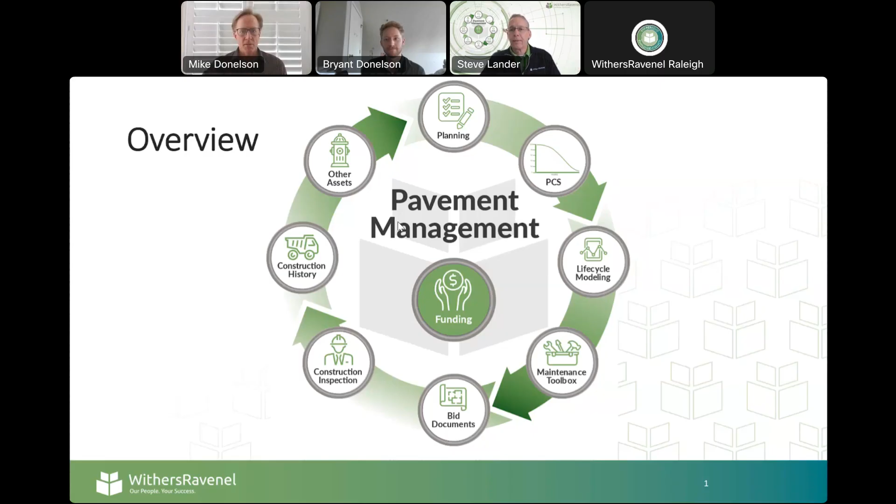All right, fantastic. Thank you. Who we are: as Donelson Construction, I'm involved with 3 different companies that we manage. We have a rock quarry, so we are an aggregate producer in southern Missouri, which is where we're located. Had this quarry for over 50 years, so we've been in business a very, very long time. And as Bryant indicated, my family goes back a long, long way in the construction industry. But we also produce our own emulsion. We develop our own technology, our own equipment, and we are a contractor. So we're honestly very unique in who we are and what we do.

And we do this by choice and almost forced into it over time, because I'm an engineer first. I'm not a sales guy. And so quality control, all those things that I learned at an early age in a different career, I knew I had to bring to this industry, which was and still is: well, you pick a local aggregate, you find somebody to make some oil, you go out and you do a surface treatment, and really it's a flawed method. It's a flawed way of doing things.

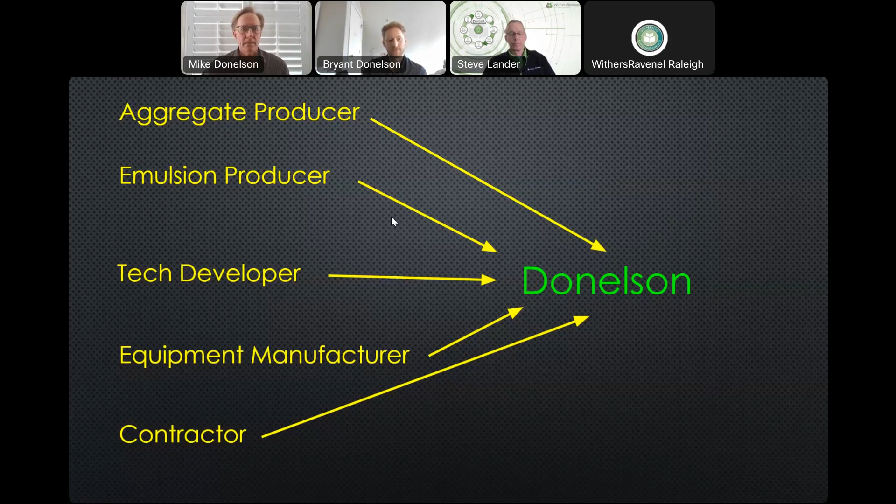And we found a long time ago, the best way to produce the best results is going to be to hand pick an aggregate, hand pick the emulsion oils, the oils that go into producing this asphalt, and then all the other things along with it, and finally the guy that installs it. So with us, you're pointing the finger at one individual at the top as far as quality control, and so that's really why we do what we do. Everything that we produce does, like I say, come out of this 800-acre quarry in southern Missouri.

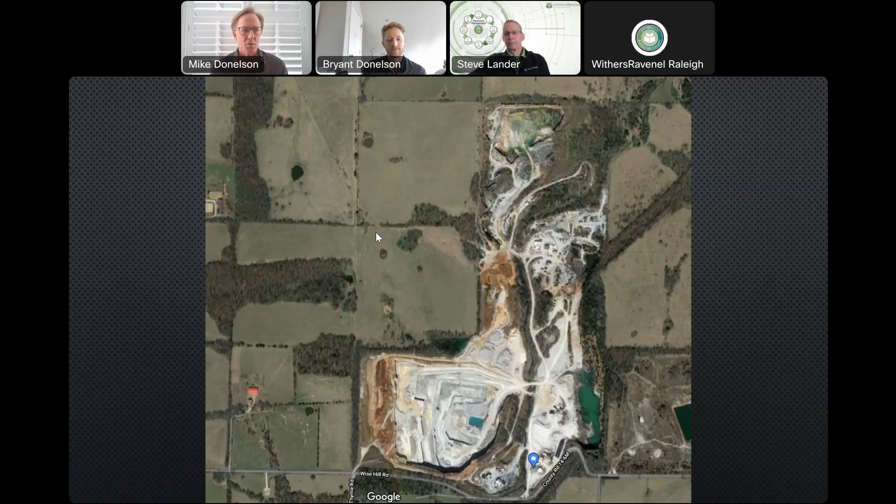And in the genre of products that I'm talking about, which is utilizing aggregates and emulsified oils, which is the industry standard for surface treatments, generally speaking, they're all made in that same genre of rock and oil. We have just, God blessed, some fantastic aggregate at this quarry, and then our own emulsion that we specifically design for that aggregate that gives us the best results. And I will dive into that in just a second.

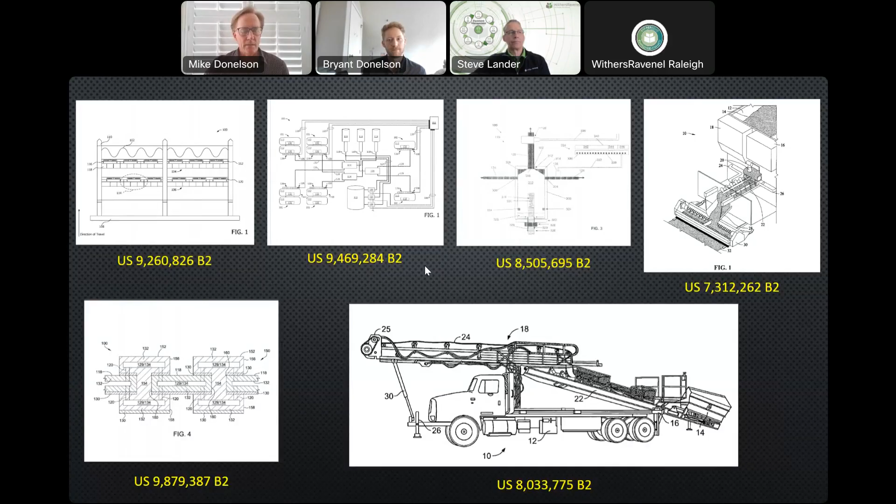As a result of our specific methods and everything, we have several United States patents, and I actually just got another one approved a week or two ago, and I've got others that are in the process of being approved. And you get these, they don't just hand these out. You get these because they're innovative. They provide a great benefit to the industry. And again, you're going to see some of the results of what we do and why we're able to achieve those patents.

If you haven't seen the PressurePave system yet through the videos, I would highly encourage you to visit our website and watch some of these videos. But what the PressurePave system is actually doing is putting down two different products at the same time. And I'm going to get to show that in just a second here. But the driving surface is the MAQS, Modified Aggregate Quickset. And we actually have a patent on the driving surface alone.

And I've been doing this driving surface for about 20 years now. So a lot of longevity with it, a lot of great results over the years. And then we incorporated at a much later date, probably about 5-6 years ago now, the pressure injection crack system and stress absorbing mastic that goes underneath this driving surface.

So if you look at the three options that we currently have, the 1/8 of an inch, the 1/4 of an inch, and then the 3/8 of an inch. The 1/4 of an inch is kind of our bread and butter. That is the type 2. That is the one that we utilize most in residential areas, in light collectors, some heavy collectors. And I'll show you some longevity pictures of that in just a second. So that one's really been our bread and butter.

We've done it the longest. 3/8 of an inch is something that we developed later to get that same longevity out of some heavy arterials. So I've got that product currently on an arterial in our area that's seeing 35 to 40,000 cars a day. That's a lot of traffic. In the city application, that's a lot of traffic.

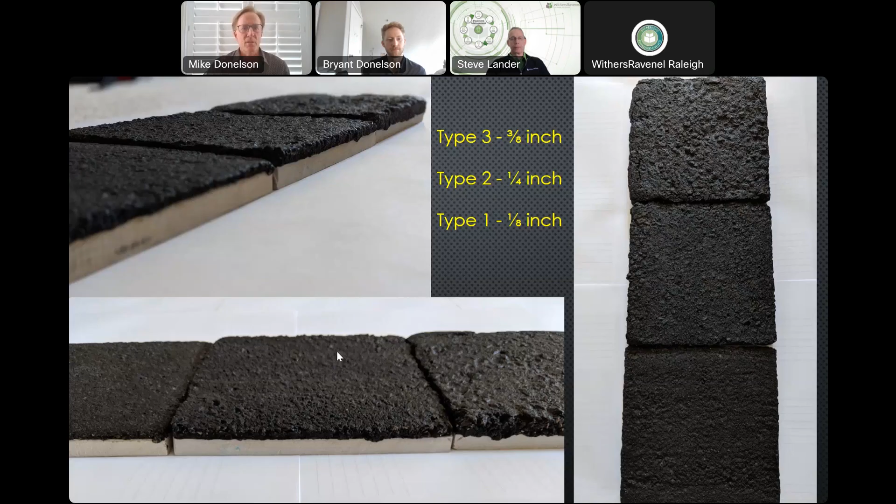And so we have gone to the 3/8 of an inch version in those applications, but the 1/4 of an inch is the one that, as Bryant indicated, you put on a light collector residential street. We've got a long history of 12 to 15 years of life out of that, and it's actually still looking really good. And I'll dive into that in just a second.

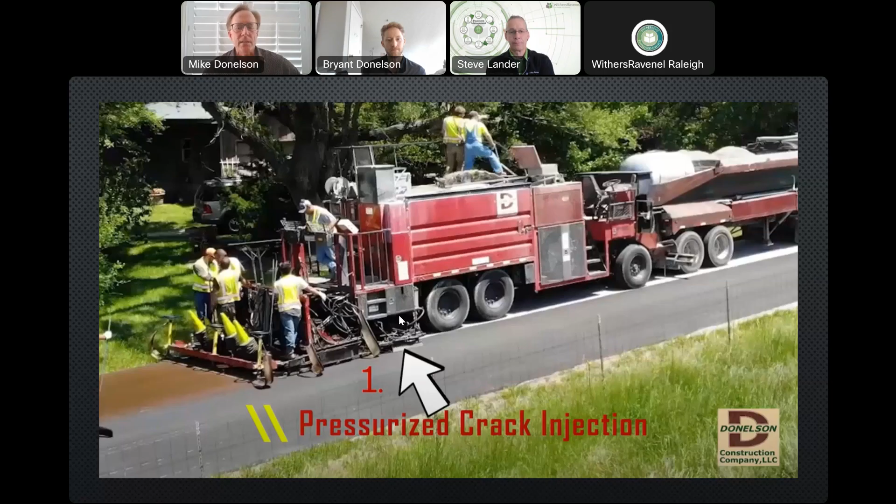But also what is being pumped on board to this unit is the PressurePave sealant. And that is what we're doing in this area right here. So we are pressure injecting a material onto the pavement ahead of that driving surface. This is our PressurePave sealant.

And this device that we have a patent on is a scissor-like mechanism. And this mechanism actually has about a 1 foot box or chamber located across that driving surface. Now, why did we go with a 1 foot box? Well, if you think about it, most roads are not flat.

They have a contour to them, either by design or through age or whatnot. And so in order to get the bottom of these boxes flush with the pavement, you can't do it with one long line segment. You do it in individual line segments to be able to contour to the surface. So we are pressurizing and pressing down to the pavement each one of these individual boxes or chambers. And these boxes are open at the bottom.

And I'm actually firing material into these chambers. And so we're creating a positive pressure gradient in these chambers, so that as this whole unit goes down the road at anywhere from 200 to 300 feet a minute, we have ample material and ample pressure developed on the underside of these chambers, so that as that open chamber sees a crack in the road, we actually have ample material and pressure to fill it. So all the cracks, large and small, are going to get filled with this PressurePave sealant.

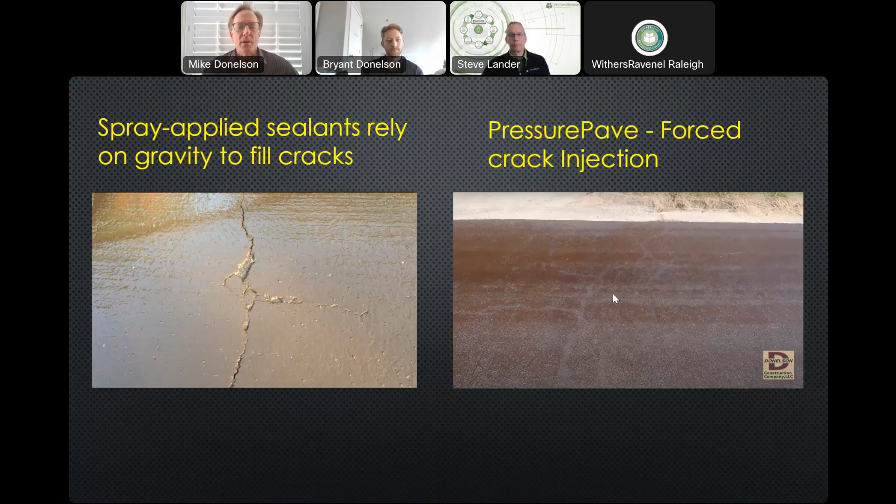But we really like showing this photo because you can see all the additional liquids that are down into these cracks as they're highlighted with darker lines. And so you can see all these cracks that were deep, wide, etc., and they're all full of PressurePave sealant, as well as the fresh driving surface right over the top. Again, think of this system as accomplishing three things. Yes, we're putting down two different types of material, designed completely different, but I'm actually accomplishing three different things. The first thing is the crack injection.

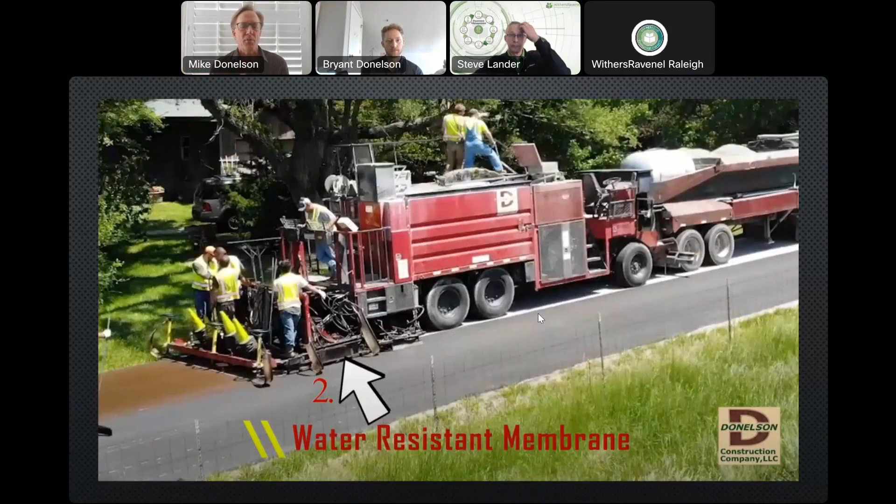The second thing is I'm using a series of rubber blades and I'm striking off that excess material. I'm creating a windrow ahead to force more of that material into those cracks as much as we possibly can squeeze in there. But we're leaving behind a thin membrane, if you will, which is the same material that's in the crack, but it is a stress absorbing mastic.

Now, what's in there is proprietary, but I will tell you that it is a polymer modified emulsion and it has aggregate. You cannot just use a simple oil, because if I do, I'm going to create a slip joint. It's very important that it is an aggregate filled material that leaves a rough texture so my thin driving surface over the top is going to have something to grip to and bond to without creating a slip joint. And we test for that in our facility to make sure we're not creating a slip joint. In fact, I've seen failures where people try to do this and do create slip joints.

Again, I've got some other goodies built into this that make it a stress absorbing mastic that is highly crack resistant. And then the third thing is the driving surface, and that is our wearing surface, whether it be 1/8 of an inch, 1/4 of an inch, or 3/8 of an inch. We designed that to seal the pavement. And as you can see from this test, it takes constant water saturation of 6 days before water would eventually penetrate our 1/4 inch surface.

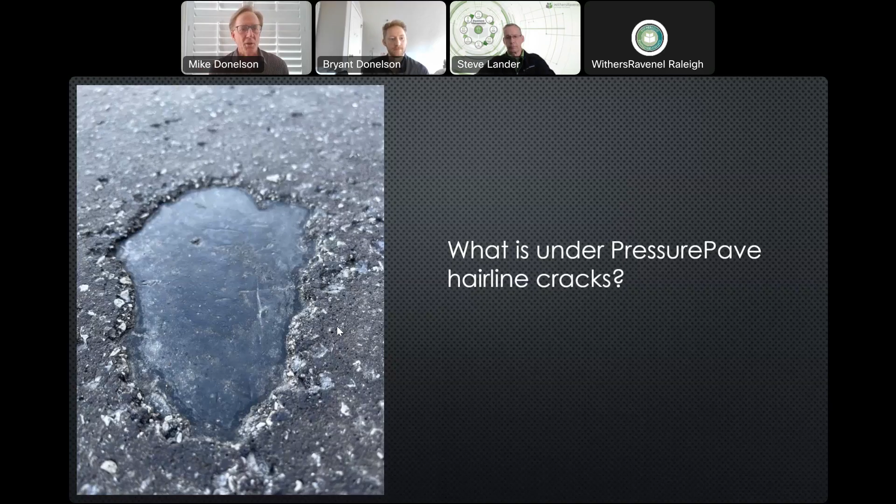It's very important. If you look at some studies, you will find that just like rust on a car, just like when you slice open an apple and watch it turn brown before your eyes, that is oxidation, a simple exposure to oxygen. And that bitumen that comes from crude oil, those dead plants and organics buried in the earth for millions of years, as you bring it to the surface, oxidation takes place. So as soon as you lay that brand new hot mix overlay, it is going to start deteriorating from day one. And so we want to keep oxygen away from that as well.

What's a good candidate for? Real quick, sorry to interrupt. If you could go back to the picture of the truck real quick, I just wanted to make one thing real clear. That whole train is not the process. If you could wave your mouse where the front of the truck is.

90% of our work is residential. The other 10% is collectors and arterials and things like that. So this machine is designed to make tight turns, be in residential tight spots, cul-de-sacs, things like that. It's different than, say, a hot in place recycle where you need that long train. This is a mobile operation that can break off into segments, and we can get into residential areas.

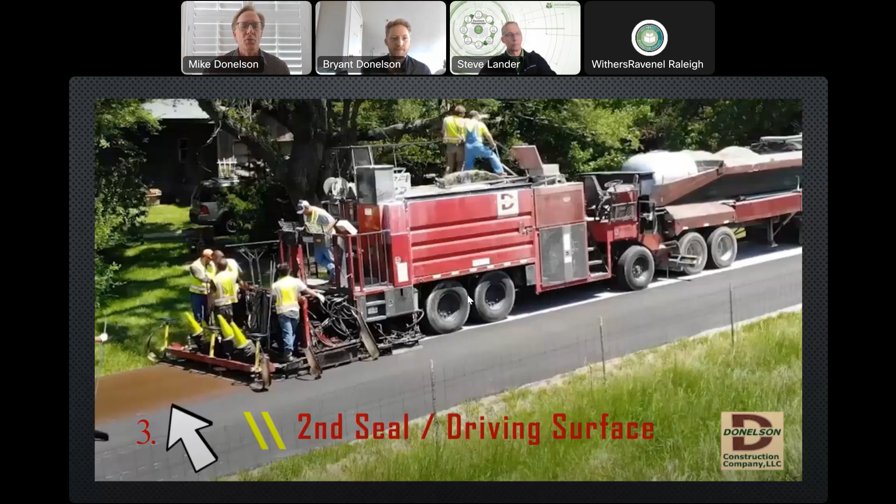Right, exactly. A good point, and I'll dive more into that with the cul-de-sacs in just a second. What is a good candidate for surface treatment? Now, I'm sure everyone here is aware of PCIs. Let's say your scale is 0 to 100. There are all kinds of options out there, many inexpensive, for those that are 80 and above, but they're mostly designed for keeping your really good roads really good. Can't fault some of those systems. Some are better products than others, but those are all options available to any agency.

But if you look at a bell curve, most agencies that we deal with are doing well to have their average PCI of 70 or above. Most of the volume of their streets are in this 50, 60, 70, maybe 80 range. You've got your really good roads, you've got some of your really bad ones, but the bulk volume is right in that middle range.

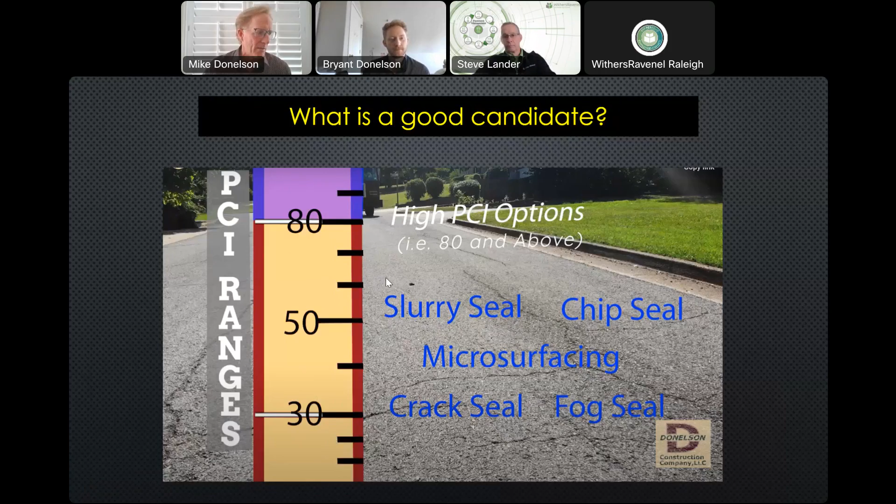And many times the easy button of mill and overlay is what is designed or thought of first in that type of situation. So if you look at even the photo as the background here, cracking is one of the big reasons why that PCI score gets driven down. I've seen it time and time again. Depends on what program, who's doing it. It's kind of a subjective situation, but cracking is something that will really drive down a PCI score.

But yet a road is good, it's solid. Maybe it's top-down cracking. Maybe the subgrade, the sub pavement is solid, but it still gets a lousy score because of the amount of cracking in it. So some people look at that, well, gosh, I've got a lot of cracking in my road. Maybe I need to go ahead and do a mill and overlay.

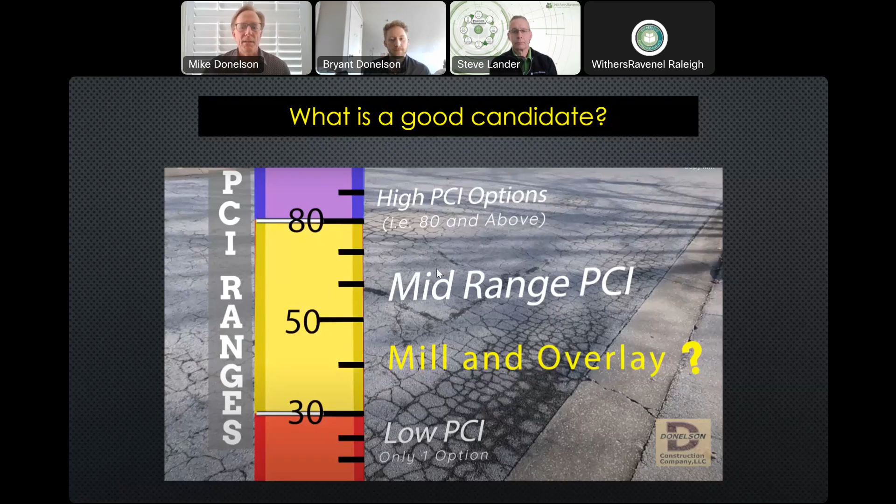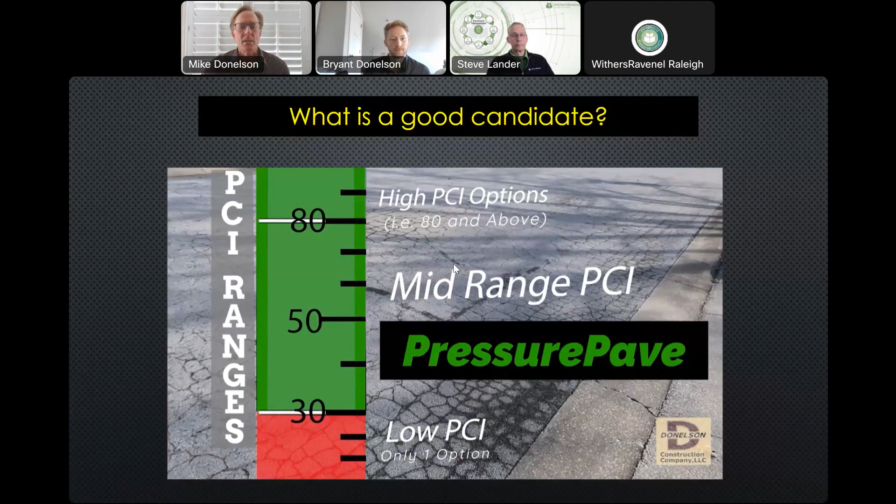And we have found, and I'm going to show you photos, obviously we can handle 80 and above PCIs quite well. But when you combine our wearing surface with this pressure injection, PressurePave system, we can really reach down into the mid-range PCIs and perform quite well. And I will show you some photos of that in just a second.

To kind of illustrate what I'm talking about with the cracking, if you look at this photo, this is one that's probably got a score, I'm going to guess, in the 60s, 70s, somewhere in there, depending on who's evaluating it, what program they're using. And again, a lot of it is going to be based on the amount of cracking.

Typically for me, with a chip seal, done it for a long time, a slurry or a micro, fog seals or anything like that, I would not recommend to an agency to do that type of treatment on this type of road. The damage has been done, the cracks have happened. Someone might say, well, we do a hot rubber crack seal. We've done that. That's a good way to help band-aid the damage of the cracks. And that was the tool that we had at our disposal as well prior to the PressurePave system.

But crack sealing has its limitations, and some of that is shown right here. If you went in and crack sealed, where would you ever quit? You kind of see that in this photo here. Somebody went in, this wasn't us, and practically patched with it. Our crew used to be faced with the same thing. It's like, hey, Mike, where do you want us to stop? This road has cracks all over the place. Where do we quit?

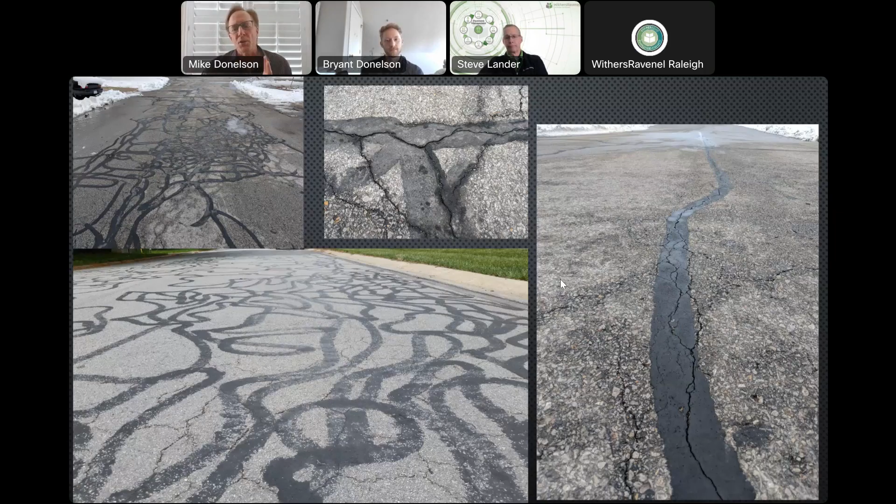Again, we were doing this too, but I saw the flaws in it and said no, for two reasons. One, we're going to get all the cracks, and our penetration is going to be through pressure injection to make sure that we are filling the cracks.

Just to give you an idea of some of the evaluations and honestly in-field testing that was done actually quite recently, this is a case study of PressurePave versus a double microsurfacing in Rockford, Illinois. Rockford and the state of Illinois actually got into a conjunction with this evaluation, really wanting to see, because double microsurfacing is something that the state has funded typically through their fuel tax credit in the state of Illinois.

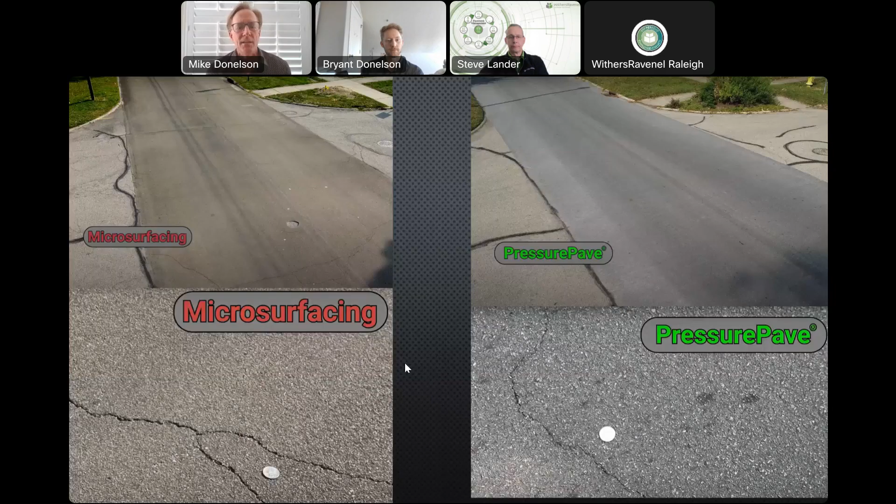But PressurePave being what it is, highly unique, et cetera, they were trying to get the same approval from the state so they can receive that funding as well. So they really wanted to do a side-by-side comparison. And I show you this simply because we are very proud of the results, and it is quite impressive what we were able to see in just 1 year.

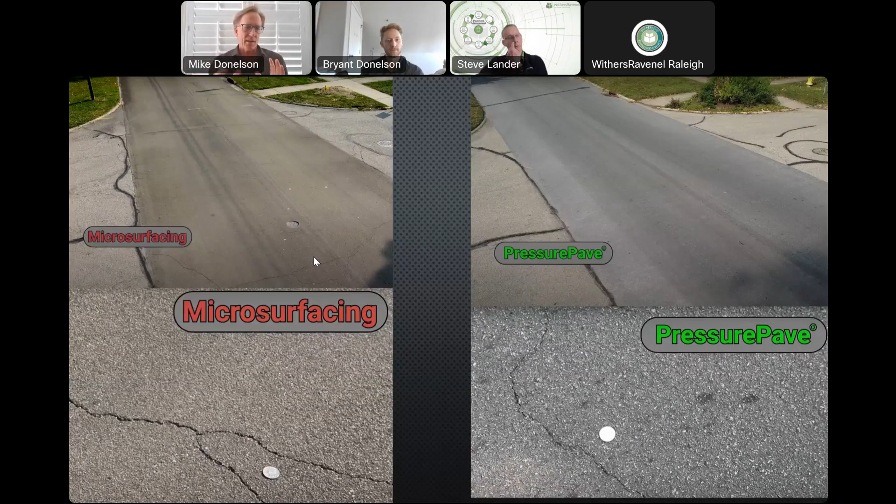With any thin surface treatment, and I'm going to tangent here for just a second, I tell people all the time, if I could ever come up with a new wearing surface that I can put over an existing crack and not have it re-crack, I'm going to retire. That's the holy grail. That's what all of us in the industry would love to be able to do. But the industry standard is 1 inch per year.

In other words, if you go in and do a 1 inch overlay, typically within 1 year you're going to see a crack come back through where there is a crack underneath, a reflective crack, usually 1 inch in 1 year. 2 inches of asphalt, 2 years. Well, any thin surface treatment, whether it be chip seals or micros or slurries or anything, has that same issue. And we were falling into the same boat, being a thin surface treatment so that there's no milling required and all that. We really suffered from the same thing, which is susceptibility to reflective cracking.

But with the PressurePave system, what we have found, and it's still ongoing and we're still evaluating it, is that ductile membrane that I'm putting underneath there, which makes a lousy driving surface but makes a great crack sealant, is really helping to slow down the reflective cracking through our driving surface. And you can see that in this case study.

Not only that, but you see that with hot mix and microsurfacing and everything else, they typically will come back through as the same width as the existing crack. With the PressurePave system and our mix design over the top of that, usually they come back as just a hairline. Now there can be additional movement, et cetera, where that gap's wider later on, but typically if that crack has done its thing, we're just going to come back as a hairline, whereas most other surface treatments out there, even hot mix overlays, will come back the full width of the crack.

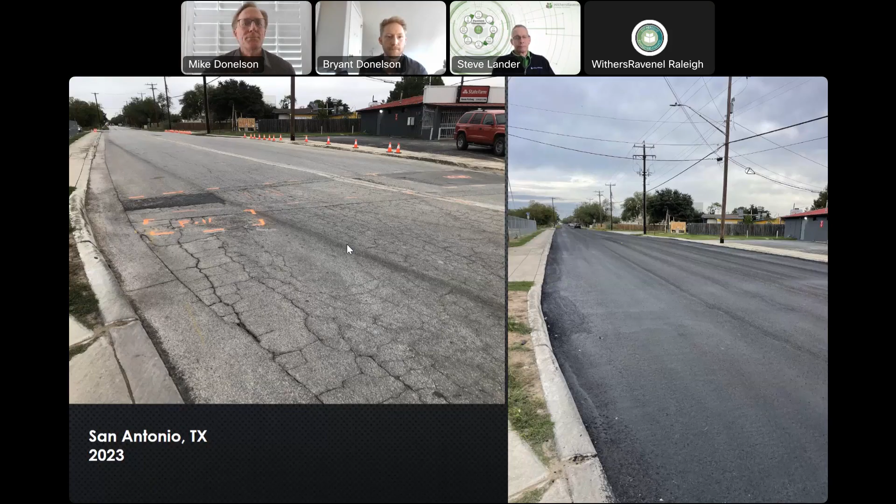Yeah. And really, maybe it's not showing up well, but most all of that surface is still there. Really, the reason we're coming back in is because of some of the cracking that has occurred, reflective cracking. But they actually had us come in and do the 3/8 of an inch version now because they like it so well, because we now made it available and they loved it. So we actually came in and did that recently in that application.

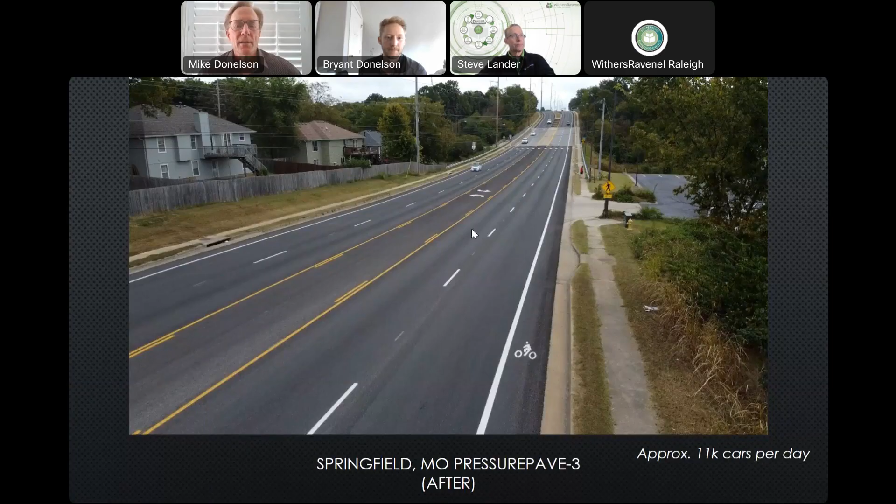I'm going to show you some before and afters and really get to, when people talk about, how long does this last, et cetera. I'm going to let you all be the judge of how long it lasts and what it does and how it performs. But I will stack this up against anything. And really, in evaluating any pavement preservation technique, I would really encourage you to seek out data like what we're going to provide to you today, which is really photo documentation and case studies of how long something will actually last versus just what we in the industry claim it will do.

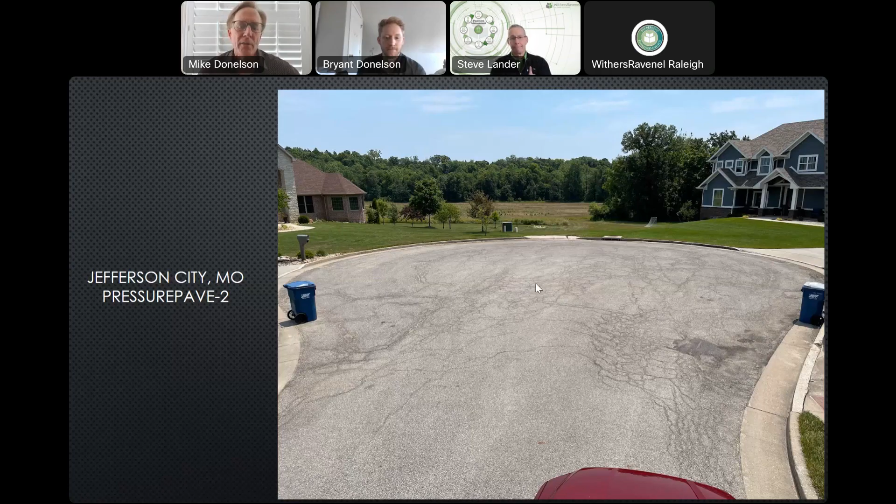But this is in central Missouri. So this is pretty well central part of the country that gets some good snow events, gets some ice events, all those good things. But this is a neighborhood that was on their mill and fill list. And you can see that we're actually going to help come in here and bring this rideability back in some of these areas. Obviously significant cracking, but if it wasn't for the PressurePave system, they would be doing a mill and fill on this.

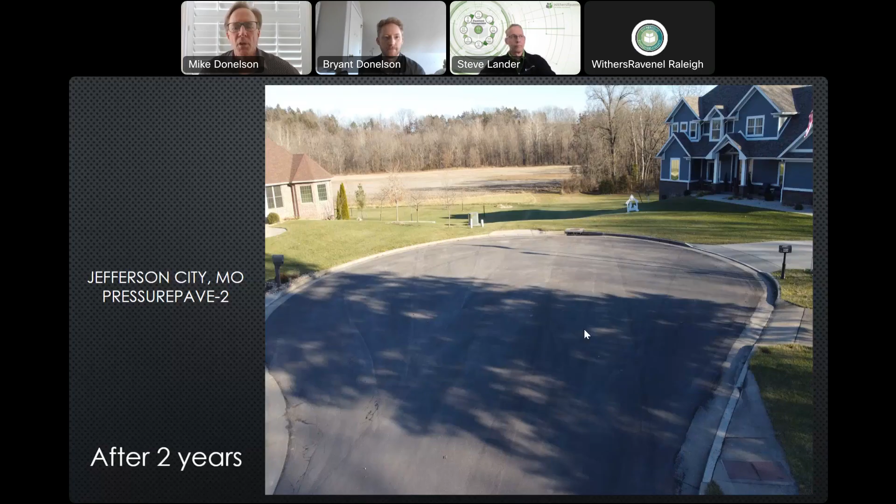Apologize for the shadows here on this, but we really like this photo because they're actually after a little bit of a moisture event, and you see some of the cracks that were just in the surface there a little bit. But again, we don't care because we know the PressurePave sealant is down below that, but we're actually able to really bring that surface back to something that they probably will not have to touch for at least 10, 12 plus years.

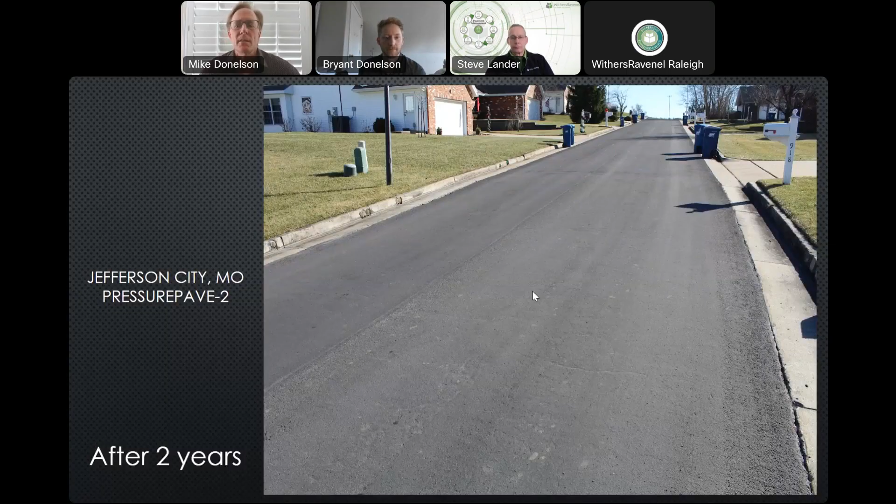Again, similarly on this same project, significant amount of cracking, and you can see what we're able to do with that and bring it back from the brink and from the mill and fill category. And again, these are roads that I will stake my reputation. They will not be doing anything to these for at least a decade, if not considerably longer.

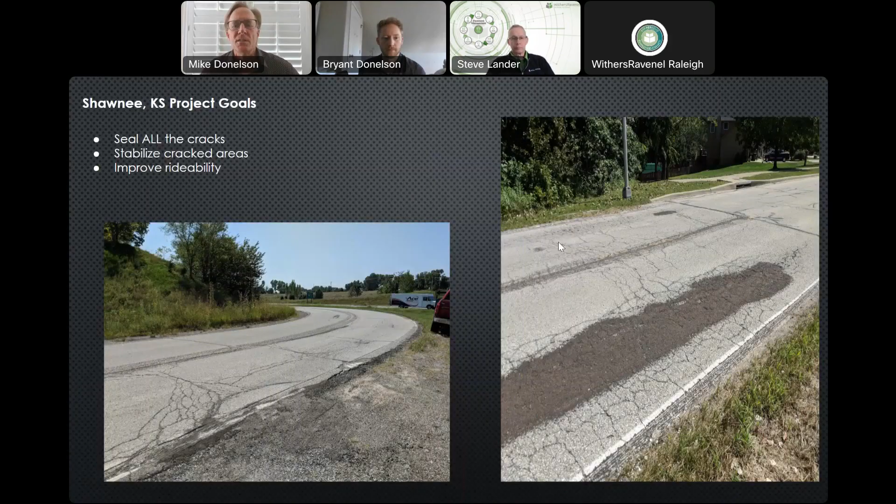Up around Kansas City, we do a tremendous amount in the heavy municipalities of, historically, St. Louis, Kansas City, outside the Dallas area, and numerous ones kind of all around the country now. But for the most part, these are some of our longest roads that we've got in place. You see some of the before imagery here. What we're able to do, this is actually sunken down a little bit. We did not go in there and pre-fill this per the request of the city. They want to see what it would do.

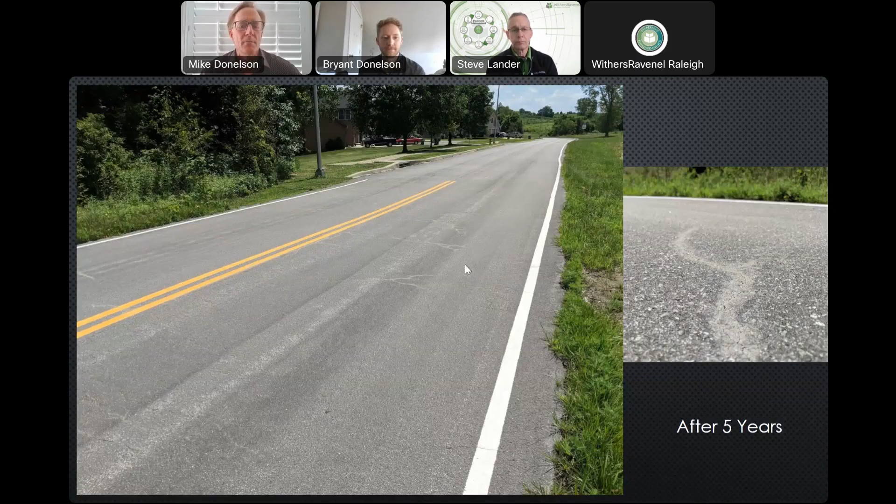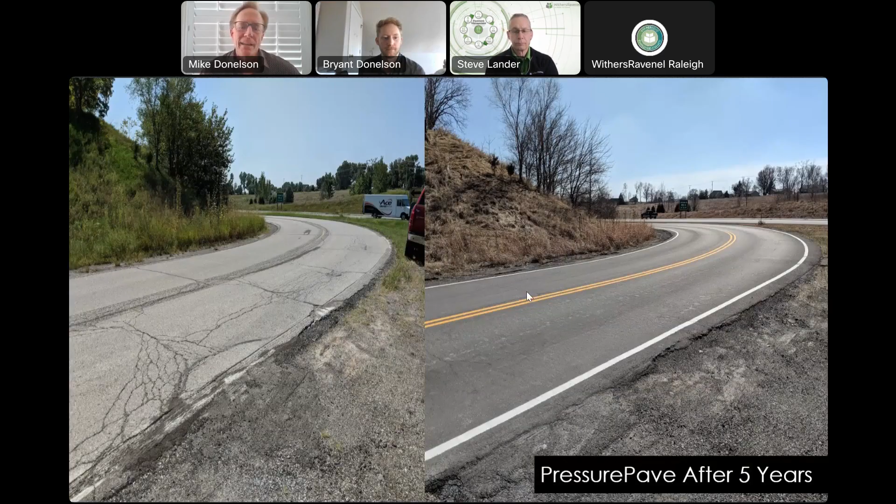Again, some before and afters on this project. And again, just to give you an idea, after 5 years, you're seeing a little bit of reflective cracking coming back through. But as you also notice, not all of the cracks are coming back through. Just some of the more substantial ones have. But again, even so, that PressurePave sealant is down there doing its job.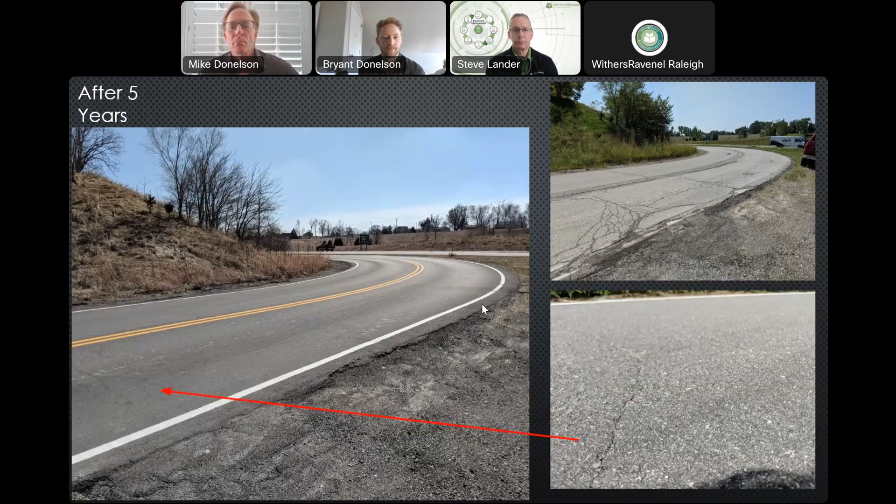This was probably one of the worst ones we've ever done. This was a street in Waco, Texas, that had a PCI of 38. I said, thanks a lot, guys. They said, well, we want to see what you actually can do. Well, they did and we did. I'll let you kind of judge for yourself, but we actually had to come in here and pre-fill some of this because these platelets of asphalt were only slightly moving and they weren't coming out anymore.

So we thought, okay, we're going to leave them. We're going to go ahead and put our sealant and our initial wearing surface in there to fill in that rutted area and then top it off. Then this is after 5 years. And this is, again, an area that even likes to hold water, but you do see some of the reflective cracks coming through. But again, this is going to be one that they haven't touched yet, and they're not going to be touching for years to come.

So how much data do we have to show how long our system lasts? Well, again, the pressure pave sealant part of this has really only come along in the last 5, 6, 7 years. But the wearing surface I've been doing for a long time. So I've got some case study information for you to see.

But even in the driving surface alone, prior to the pressure pave sealant, you can see from this photo, this was the treated area versus the untreated area. And this was 16-year-old asphalt. But you can see the moisture that is being held in there, again, after a little bit of a moisture event, and the cracks, the moisture in the pavement, et cetera, and you don't see that in our wearing surface.

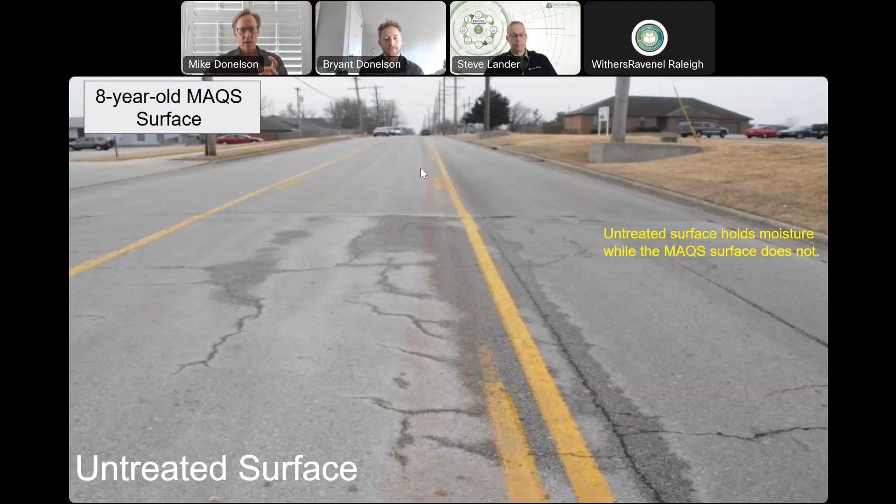So again, that driving surface alone, the MAQS, the modified aggregate quickset that we have a patent on, is just one heck of a wearing surface and a sealant all to itself. And that's one of the reasons that we've been able to get the longevity out of it that we have.

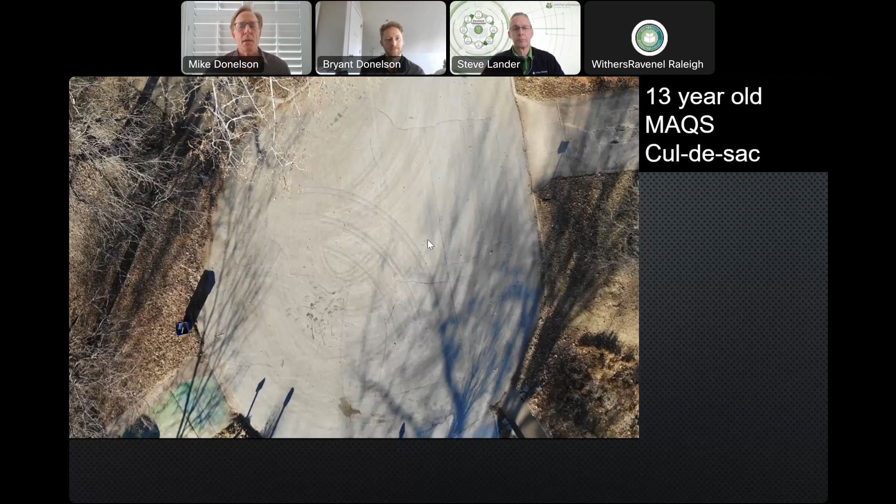One of the reasons that we do well in that type of scenario is because we don't have any handwork in our application. We actually have a patented device. We are tricking our equipment that is made to go in straight lines to go into arcs and circles and to eliminate handwork. And I won't dive into all the nuances of why, but it's a very, very special aspect of what we do.

Yeah. Sorry, real quick. Steve, how are we doing on time? Yeah, we got about 11 minutes. Okay. Is that right? Yeah. Okay. So I can wrap it here, and we can take questions if you like.

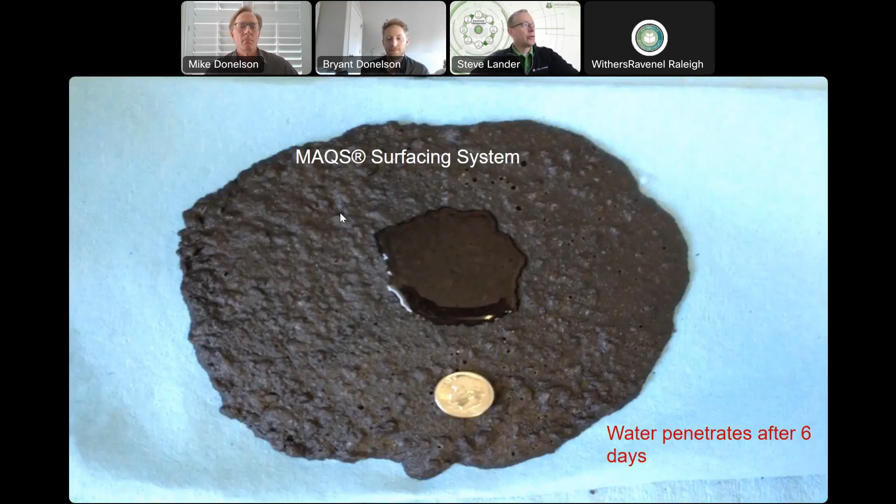All righty. So first question, do you wash and blow out the cracks? I guess you sweep it because the fine cracks are going to be tough, but do you sweep a job before you go and do it? Yes, we do broom the streets ahead of time. If they're really bad, we can get a vac truck out there. But we also have a blower underneath these machines, so any additional loose stone or whatnot in those cracks will get blown out.

Because of the way we do our system, it really does not require deep penetration of material into the crack. Matter of fact, if you know crack seal, you can actually overblow and clean out a crack, and then you got to go back with sand or backer rod or something to fill it back up again. All you're trying to do is get slight penetration into the crack and put this material over the top of that. So it really does not require deep penetration, deep cleaning to achieve what we're wanting to achieve.

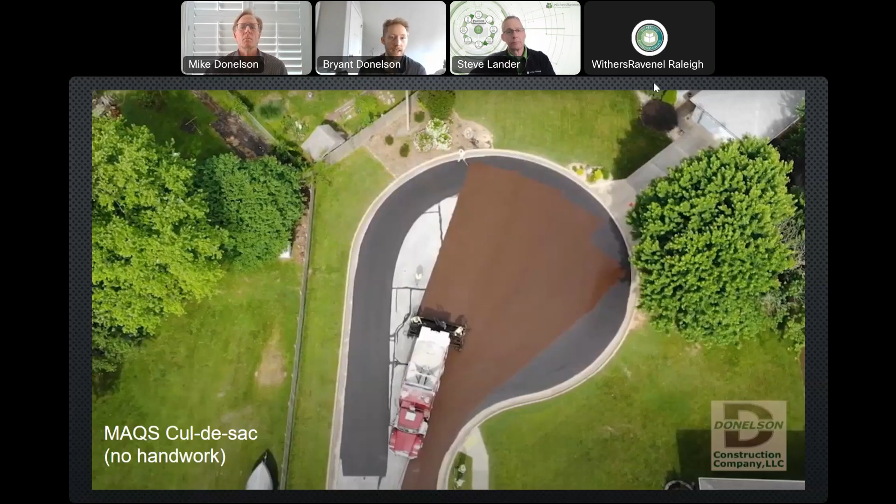Our guys will put down anywhere from say 15 to 25,000 square yards per day, whether that be residential with cul-de-sacs or collectors or whatever. They'll generally hit those numbers. And so usually to get the best pricing, we try to shoot for at least 2, if not 3 days worth of work going to an area. So 50 to 60,000 square yards usually is what people target for a starter. And it helps too if one city wants to do a project and another city wants to join in, or the city and the county, the more quantity in that general area, that's going to help the unit price going forward.

Hey, assuming the contract goes through, when were you guys shooting for trying to get this done in Lexington? I don't know if you guys are there yet, but any idea? Don't have a firm time on that. It would be during the summer months. Typical application time for us, we start in the south, for obvious reasons, in about mid-April to May, work our way up into the middle of the country, generally June, July, August, September, and then work our way back down south again, whether it be Texas, Florida, Alabama, or wherever. So somewhere in those middle months is probably where we'll be in North Carolina. And we know that their fiscal year ends at the end of June, so we'll try and shoot for before the end of June.

Oh, okay. Yeah. Good point. Good answer. So, all righty.